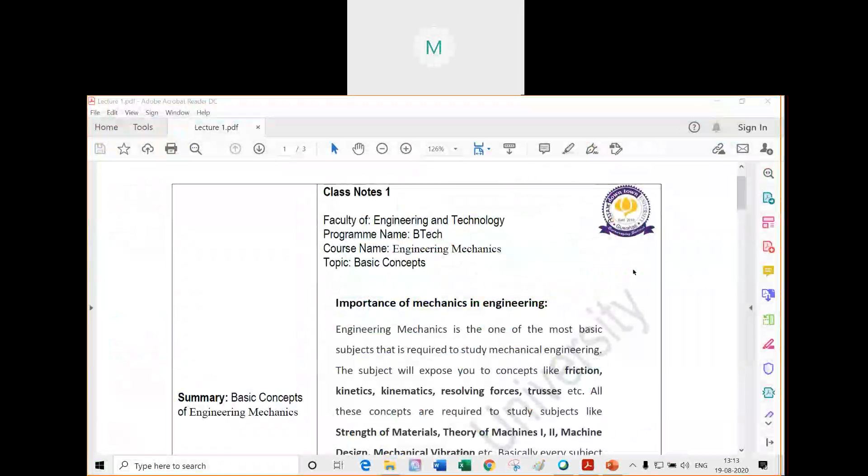No idea, sir. Okay, so engineering mechanics is what? It is the basic science, or the basic subject, which predicts the effect of forces on rigid bodies. That means suppose a force is applied on a body, so what happens? Now the impact of that force.

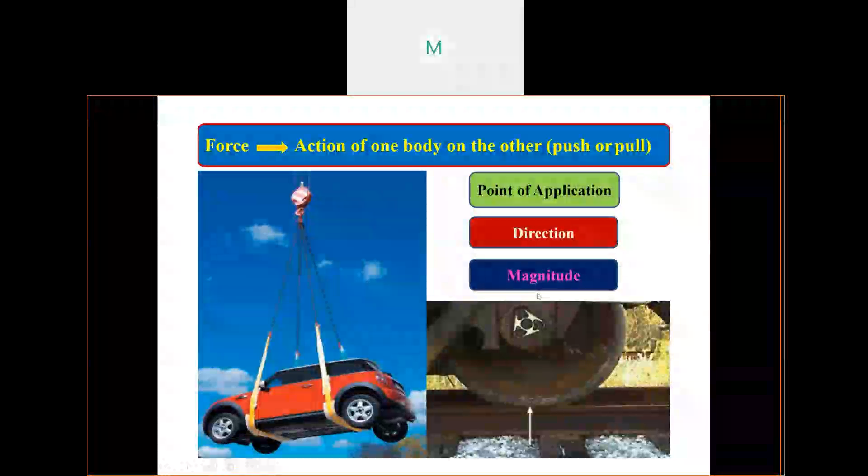So this means this is the way the forces are being dealt with. This is what is known as mechanics, and we have to know how these forces act on a particular body so as to understand mechanics. That is why mechanics is very much important. If you have any doubt, ask me.

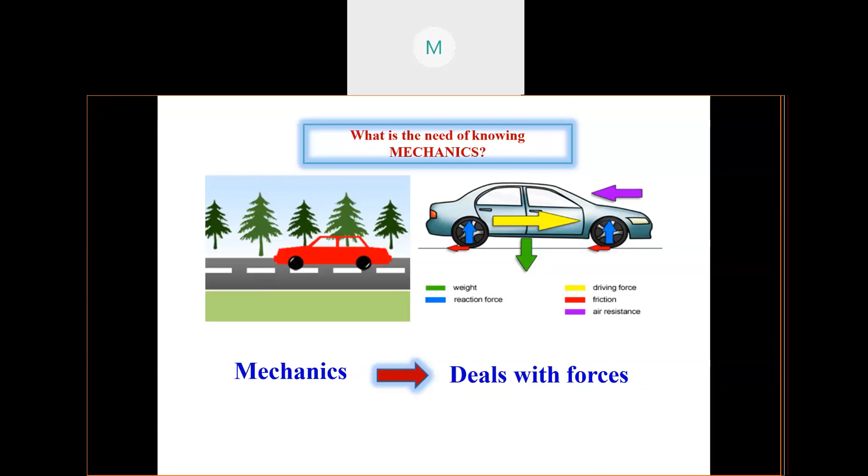Now in mechanics, what happens? We have under mechanics: mechanics of rigid bodies, mechanics of deformable bodies, and mechanics of fluids. Now all have statics, dynamics, kinematics, and kinetics. These are the mechanics of different bodies.

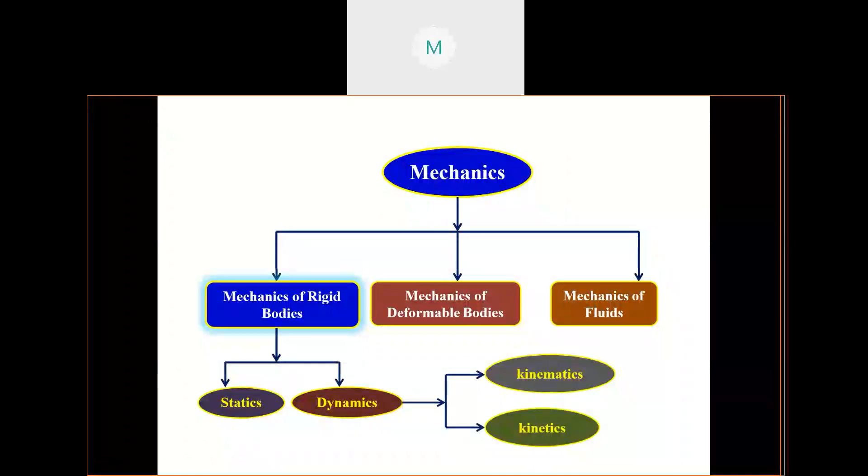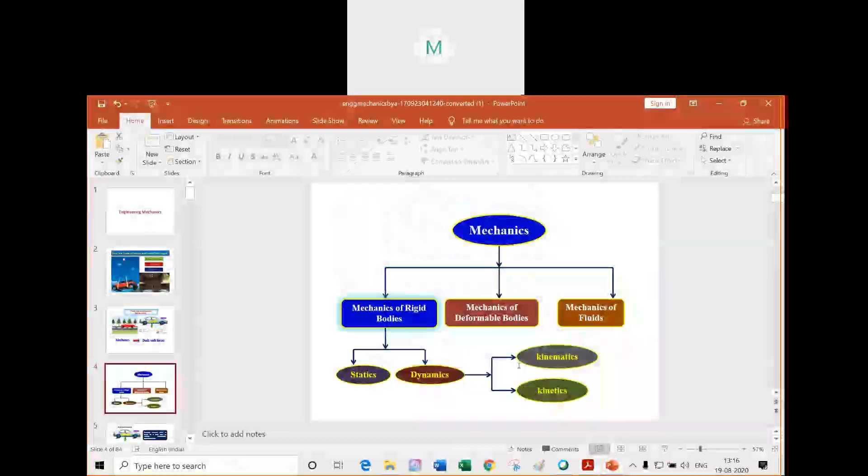Okay, so now let us come to the notes. Look, if you see here, engineering mechanics is a very important subject that is used to study mechanical and civil engineering. And the basic aim of this subject is to expose various concepts of force, then friction, then how to resolve the forces.

So eventually, what will happen? Everywhere there is mechanics. Now look, I'm giving a practical example. If you don't know mechanics, then you will not be able to know how the forces act.

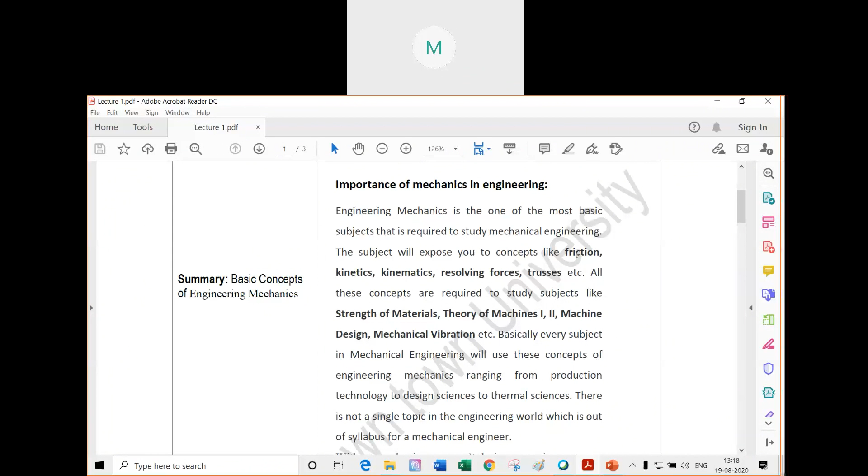Now, all of you in your home, there are certain structures which are supporting your roofs, right? So, these are beams and columns, the horizontal and vertical members. These structures are supporting the building. So in a way, we have to know how the forces are acting on these.

So how will you know? You will know using engineering mechanics.

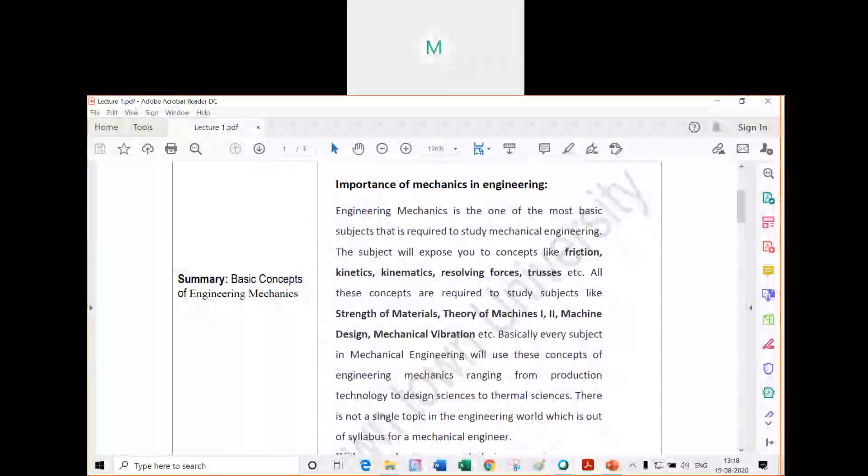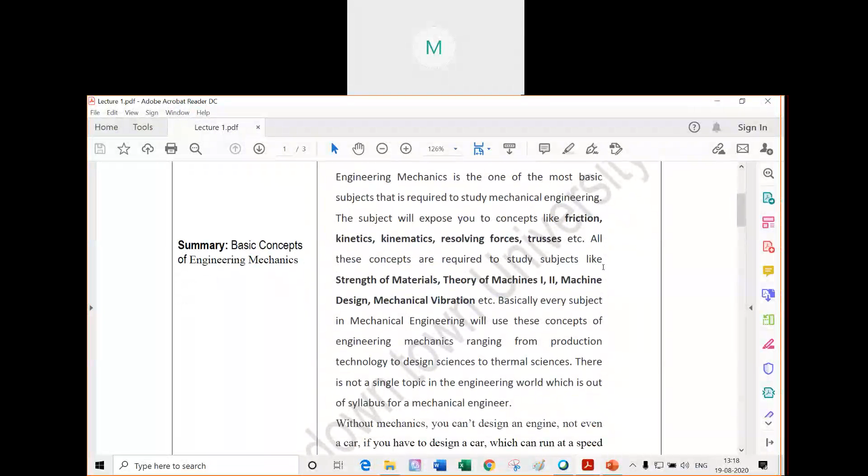Now this subject will only help you in dealing with strength of materials, theory of machines, etc. These notes you will be finding in the ERP.

Suppose your body or your car is in rest, it is standing. So there also will have mechanics, and if a car is moving or if you are moving, there also will be applying mechanics.

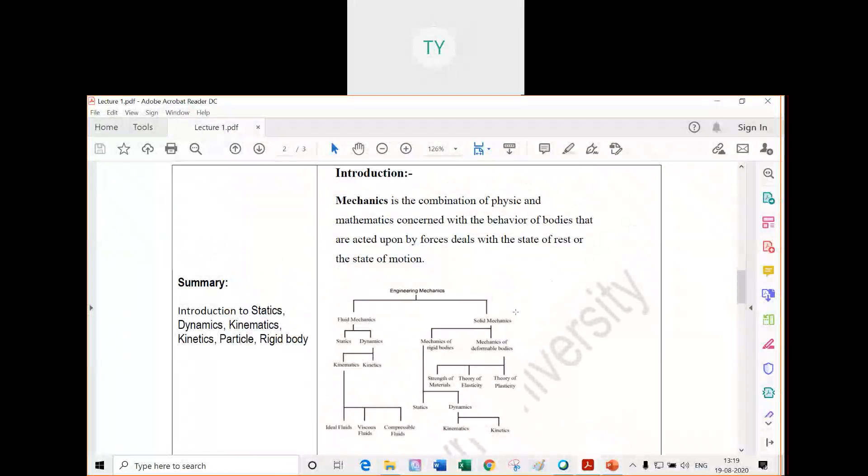Now if you see this flow chart, under mechanics there are fluid and solid. So under fluid mechanics again there are statics, dynamics, kinematics. And then in fluids we classify fluids into different parts: ideal fluid, viscous fluid, and compressible fluid.

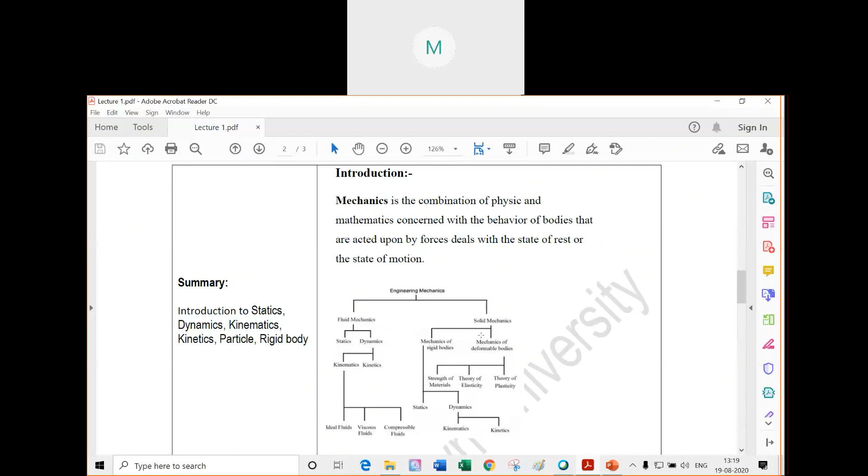Similarly in solid mechanics there is theory of elasticity, theory of plasticity, and strength of materials. Now again we classify these things into dynamics, kinematics, and kinetics.

Now let us understand certain definitions. Let us go to statics. Hello, everyone is hearing? If you have any doubt, you have to ask me. Okay, so first of all, what is statics?

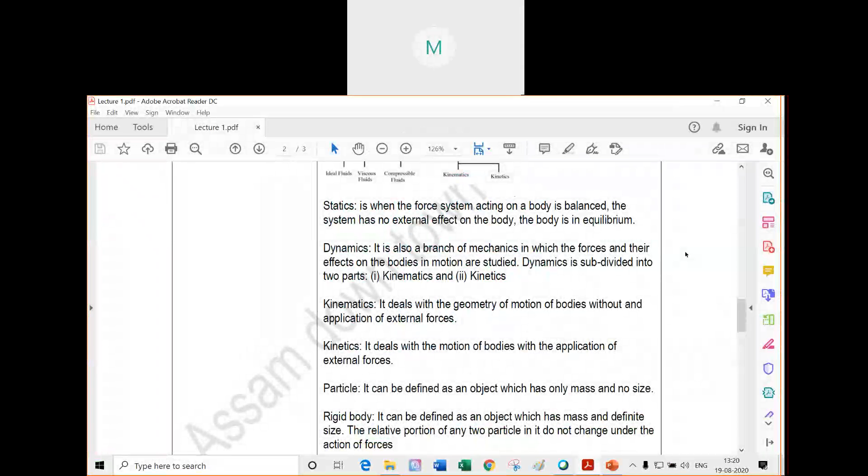Now look, when the force system acting on a body is balanced, and the system has no external effect on the body, then the body is in equilibrium.

Now, for a static body, that means that body is not moving. No external forces are acting on the body, so the body is not moving. Now, in case of dynamics, what happens?

It is the branch of movement. Dynamics means, suppose a body, a car is moving. So, what happens? In this branch of mechanics, we have to study that movement of the car.

So, dynamics is divided into two parts. Number one is kinematics and number two is kinetics.

Now kinematics means it deals with the motion of bodies without an application of external forces. Suppose there is no external force being applied on a body. So this will be dealt by kinematics.

And in kinetics, what happens? It deals with the motion of the bodies with the application of external forces. So in this way it has been done.

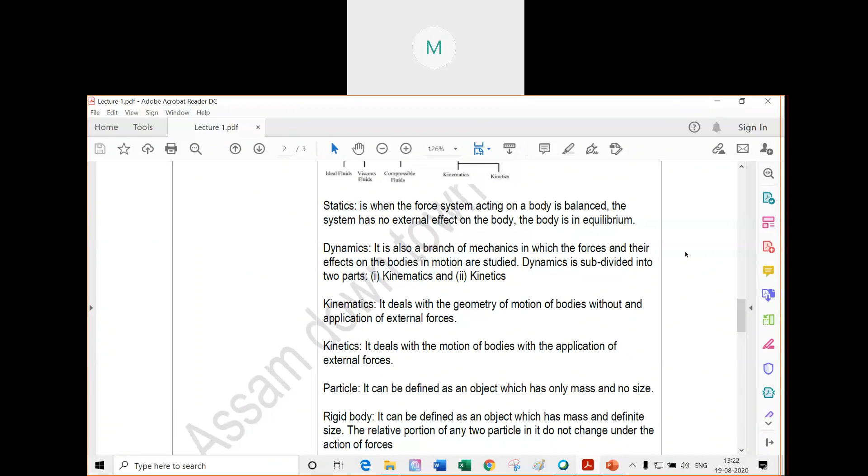Now particle. Particle can be defined as an object which has mass and which has no size. And then coming to rigid body, it can be defined as an object which has mass and definite size. So this can be termed as rigid body. So in this way we classify.

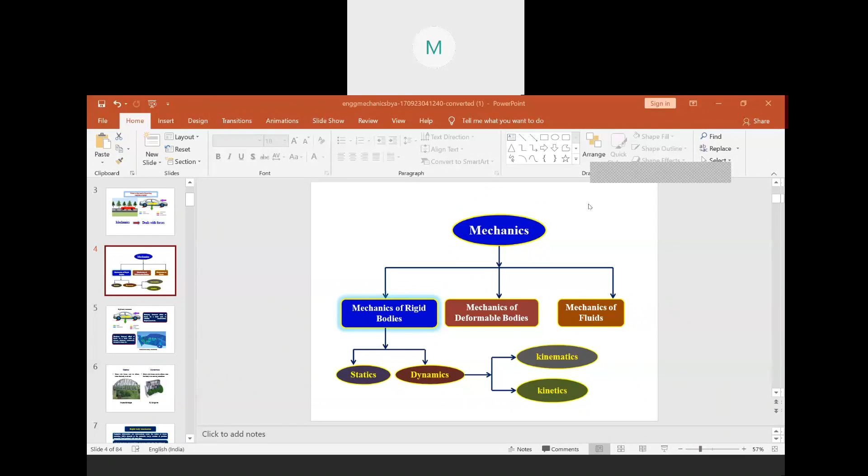Now in rigid body mechanics, what happens? We have to study the external effect of forces on a body. Suppose now if you consider this car to move, it has velocity, acceleration and displacement. So these parts will be dealt with under rigid body mechanics.

Now if you go to deformable body mechanics, that means what? Suppose the car has hit some object. Now it gets deformed, this part is deformed. Are you able to see it, students?

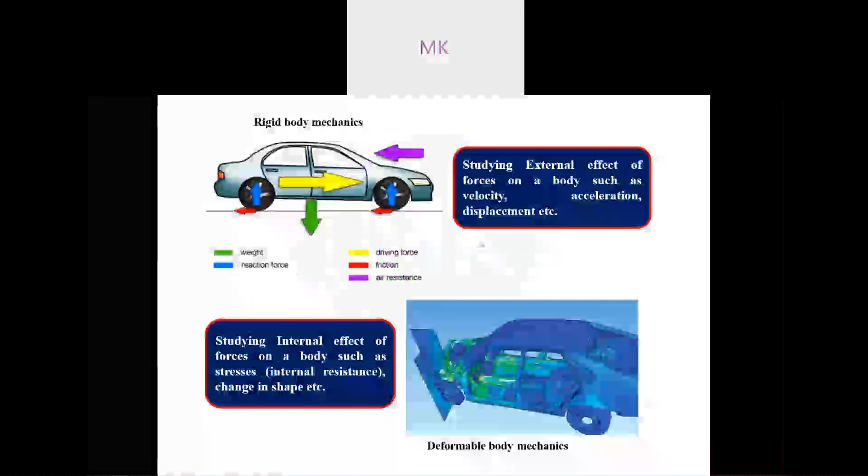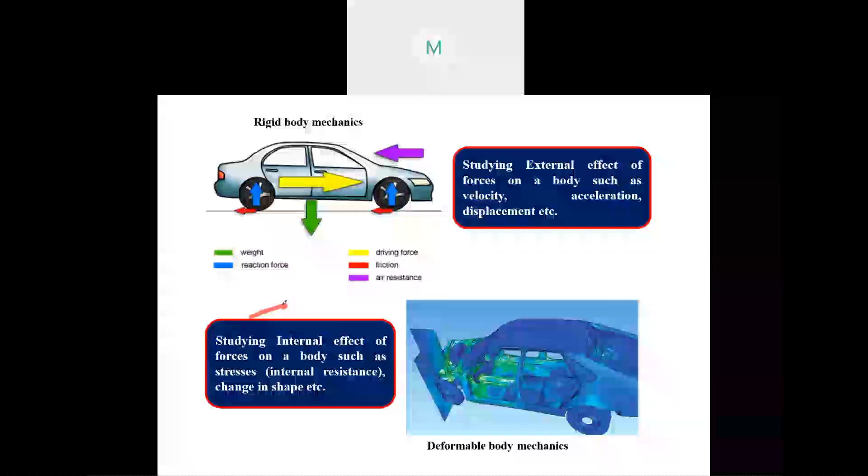This part, now can you see? This car, can you see it? Look at this car now, look at this part. This is having certain deformations in the car. This is having a certain amount of deformation, right?

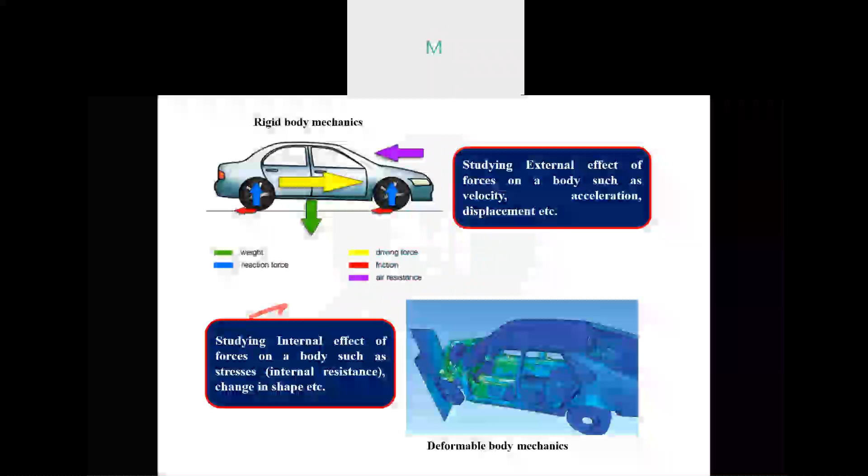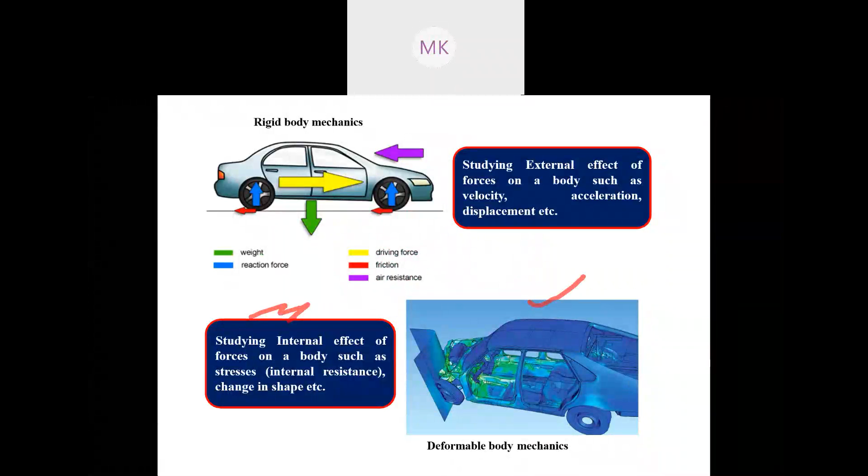So this is the internal... Your voice is not clear, my voice is not clear. Sir, we can hear the voice very clearly. Okay wait, I'm having some network issues I think, just give me a minute, let me see what I can do.

Okay, is it clear now? Hello, is it clear? Yes sir. Okay, if it's not clear, write in the chat.

Okay look, now this car, in this car what happens? This car has hit some object, right? So after that, if you study about the internal damages that has happened to the car because of the forces being applied on the car, so this is given as deformable body mechanics.

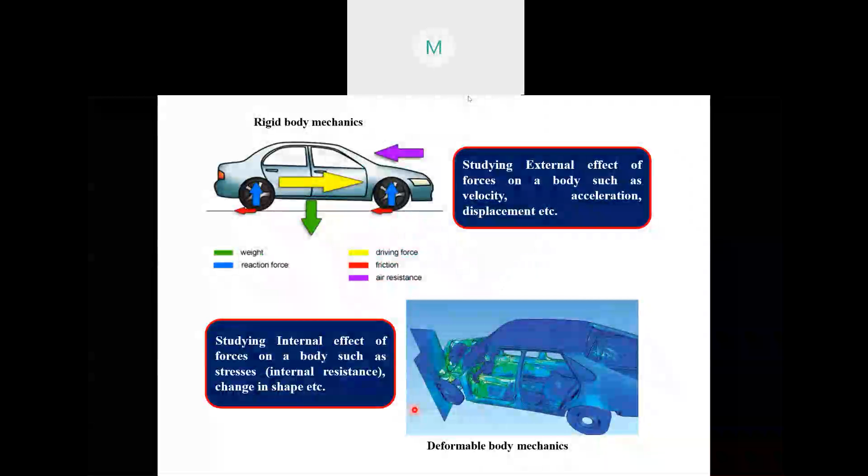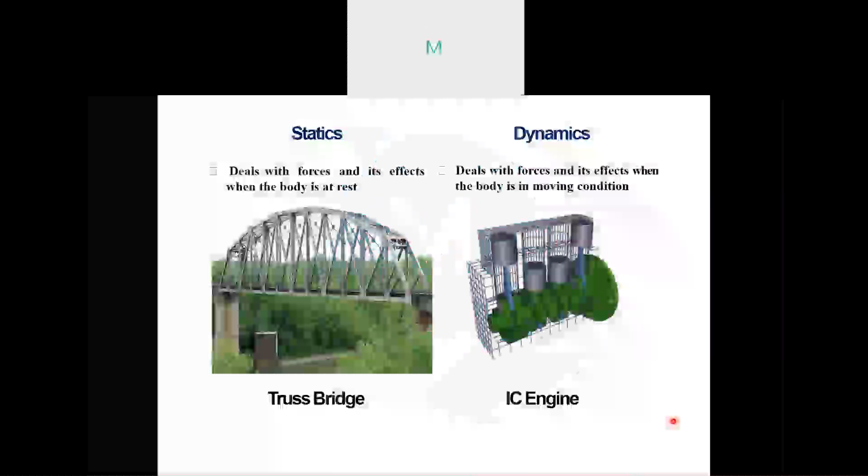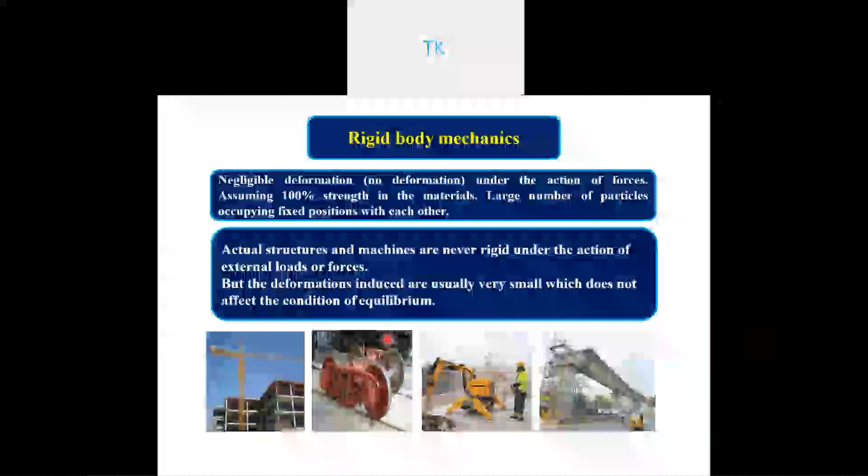Okay, now let us study some rigid body mechanics. So what is rigid body mechanics?

Are you able to see the slide? Yes, yes, yes, we can see.

So in rigid body mechanics, this means what? If the forces are acting on certain bodies that are not moving, that means there is negligible deformation or no deformation under the action of forces.

This means what? Suppose this bridge is being constructed now. If any force is applied, there will be no movement in this bridge, right? If you try to push it, yes or no?

Are you able to see? Yes sir, yes. Please respond a little so I know you are following.

So what happens is that suppose if you are trying to push this bridge and there is no movement, this kind of body is called what? What is this kind of body called? Can anyone say?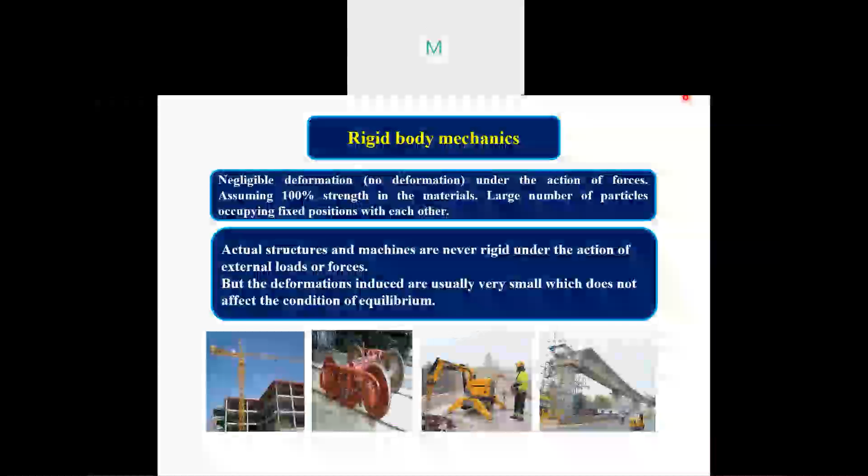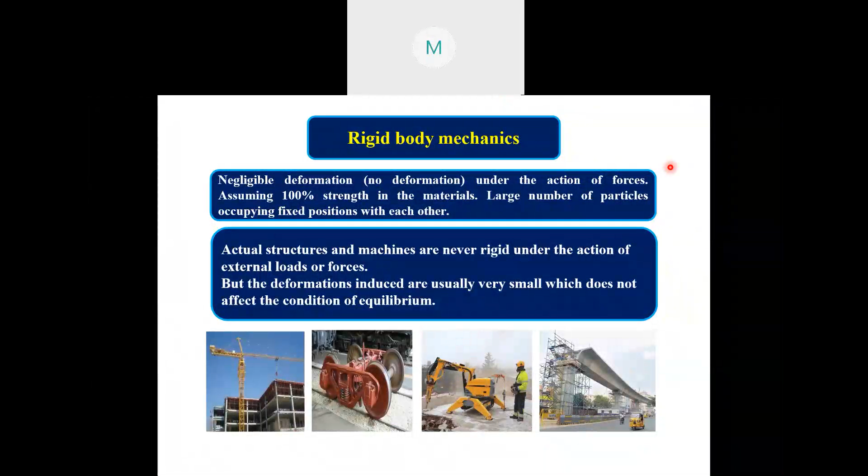Yes, so this is called rigid body. In this way, rigid body mechanics is happening. Here the deformations will be very small, and it does not affect the condition of equilibrium. So in this way, we can say it is rigid body mechanics.

Now we go to particle mechanics. So what is particle mechanics? If you treat a rigid body as a small particle as compared to the size, meaning the size of the rigid body is very small as compared to the size, then it is called particle mechanics.

Oh, my voice is not clear again. Is it clear now? Hello, is my voice clear now? Clear sir, no sir, unclear audio sir. Severe network problem is going on, that is why I guess.

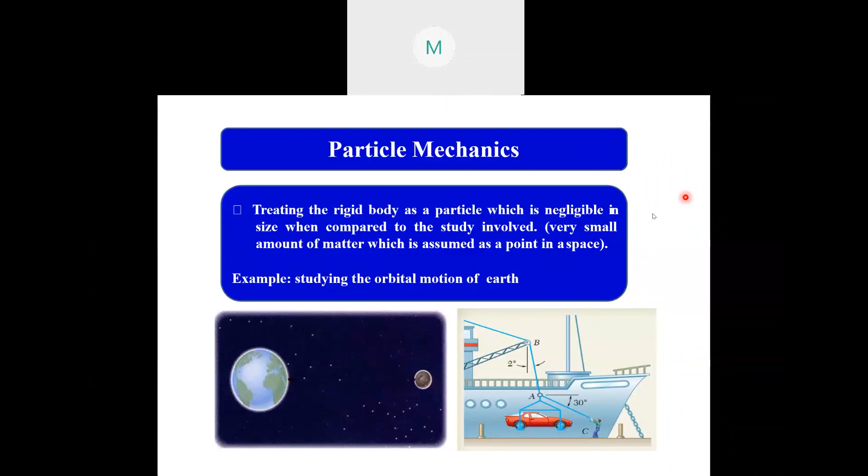Particle mechanics. Are you able to hear now? No. Hold on, wait a minute, hold on a little.

So what is particle mechanics actually? Particle mechanics is, suppose you are treating a body as a very small body. Suppose what happens if you consider the whole earth and you are considering yourself to be a small particle, does that make sense?

Now if you see in the diagram, yes, the orbital motion of the earth is considered to be a particle motion. That means if the earth is moving in orbit, we can consider the earth to be a very small particle in the whole universe for studying it. So in this way we can say it is particle mechanics.